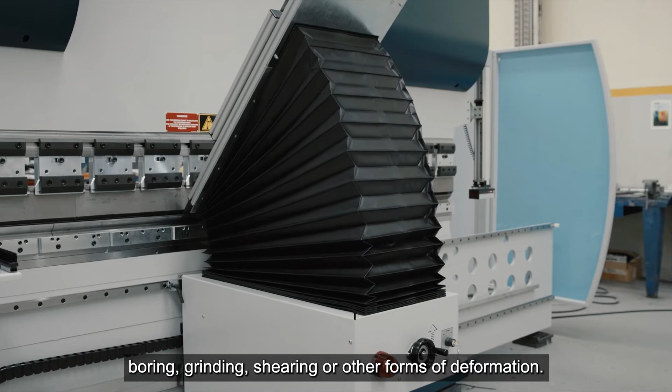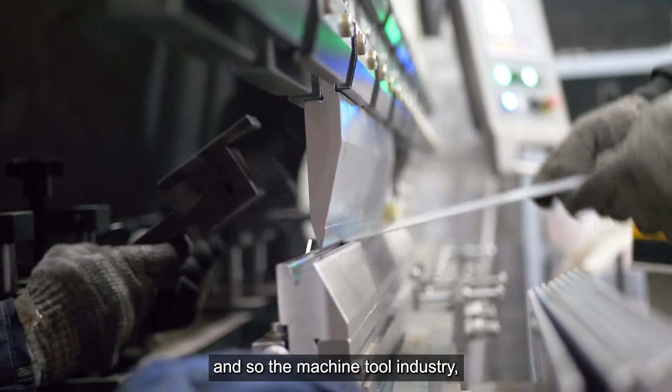A machine tool is the name given to any device for handling or machining rigid materials such as metal, usually by cutting, boring, grinding, shearing, or other forms of deformation. Our modern world would not be possible without machine tools, and so the machine tool industry, those companies that actually manufacture these devices, are interconnected with nearly every other major industry. And in a world trying to become more sustainable, this industry is also taking steps to move in that direction.

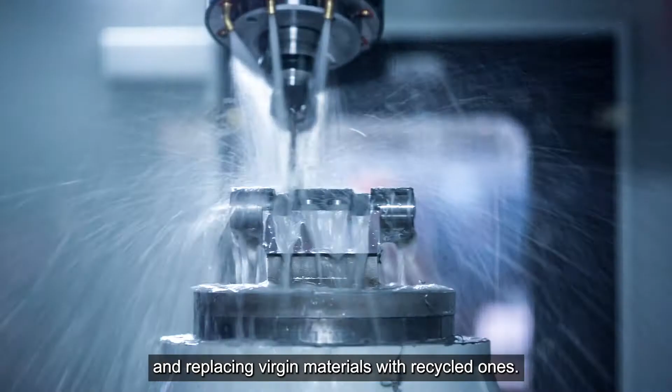To keep Europe competitive and achieve our sustainability goals, we need to maximize resource efficiency. This essentially means putting the materials contained in our waste back into productive use and replacing virgin materials with recycled ones, forming a closed loop, the basis of a circular economy. To make it feasible, industry must be innovative on several fronts: technological, financial, social, and organizational.

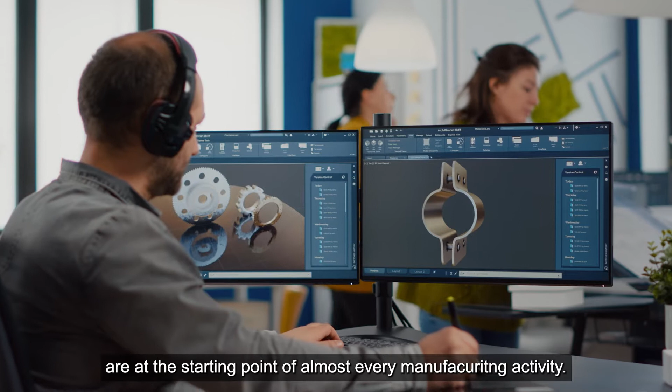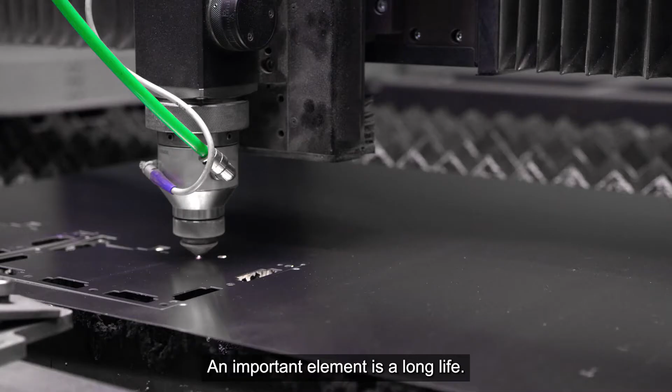Many people don't know that machine tools are at the starting point of almost every manufacturing activity. Our sector has a hand in most manufactured products. For instance, 83% of a machine tool is already today composed of easily recyclable materials. But we should all know that the circular economy goes beyond the recycling of materials. An important element is the long life, reuse and remanufacturing of products, with the aim of keeping them in the economy for as long as possible.

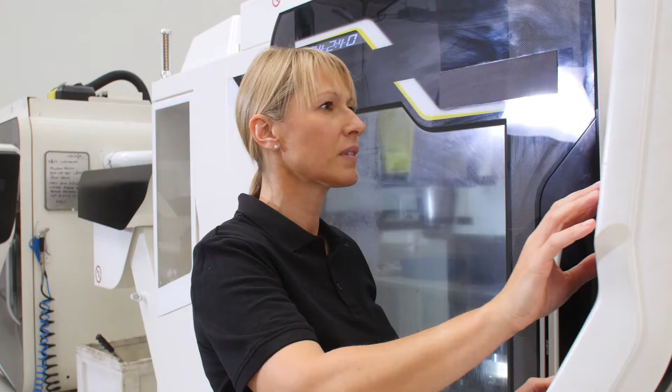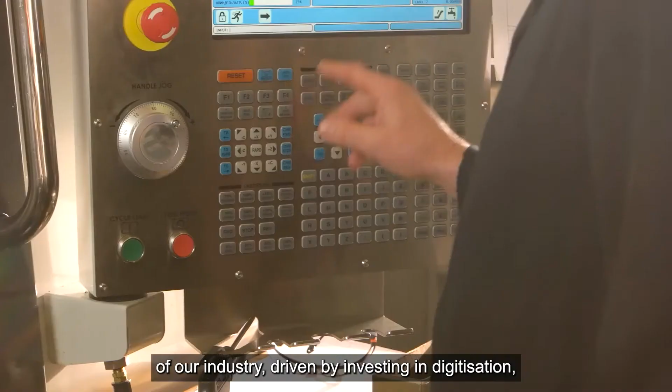CECIMO is the voice of the European machine tool industries and related manufacturing technologies that brings together 15 national associations and represents its interest at European, but as well on the global level. For more than 70 years, CECIMO has been promoting the manufacturing competitiveness of our industry, driven by investing in digitization, sustainability and innovation, and therefore contributing to the EU economy.

When it comes to sustainability, CECIMO's member organizations are innovating in various ways to improve their contribution to the circular economy. This manifests in a range of different actions aimed at improving the performance of its products and greatly reducing resource inputs in the operation of these machines.

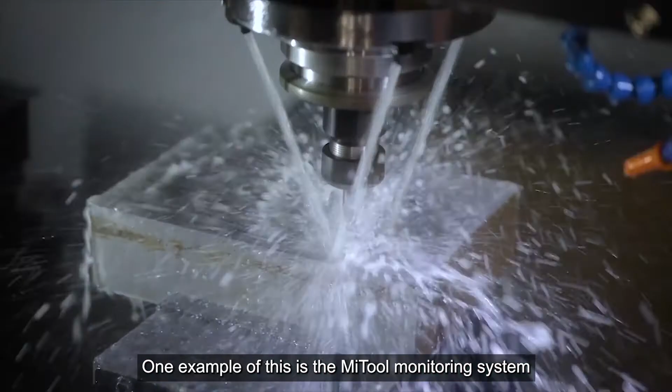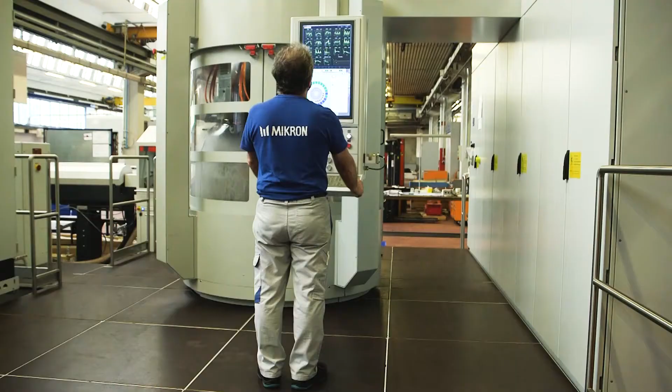One example of this is the MiTool monitoring system developed by manufacturer Mikron. Mikron supports industrial production companies in a wide variety of sectors. We produce and deliver high-performing machining systems. Our transfer solution aims to reduce cost per part produced, space requirement, staffing cost, and to increase manufacturing quality. When in addition, the Mikron MiTool monitoring system is used, also significantly fewer cutting tools are needed. All this has a significant ecological impact and supports sustainable manufacturing.

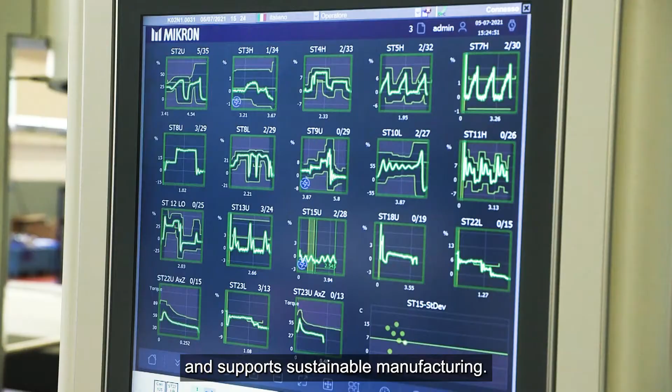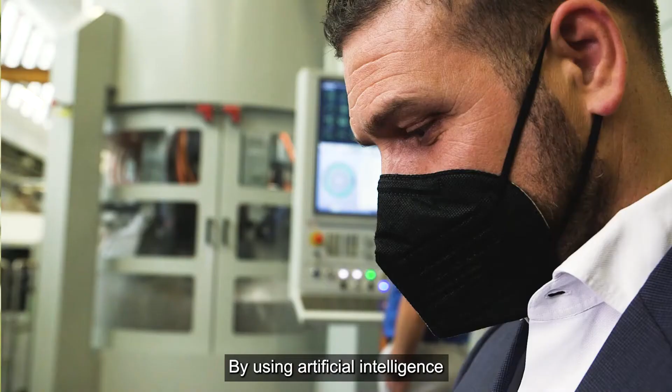Mikron MiTool has the highest sensibility and quality of data points, which deliver the finest and exact monitoring curves needed for the analysis. By using artificial intelligence, we developed an algorithm for advanced process optimization and cutting tool wear identification. All this leads to higher control over the production process.

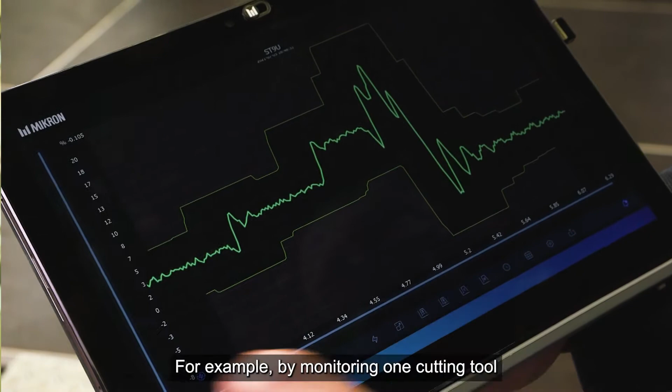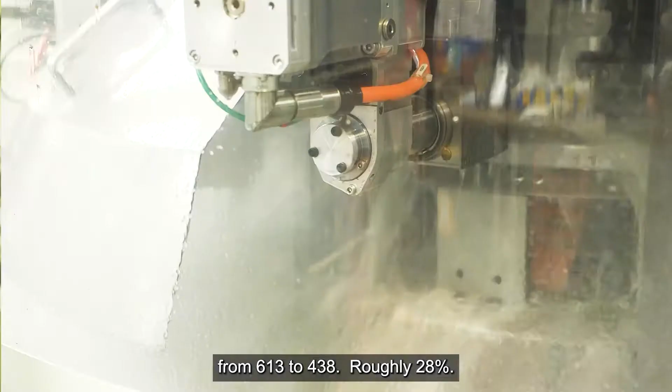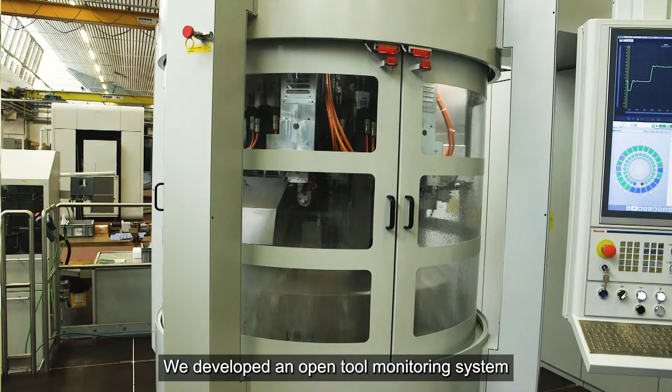For example, by monitoring one cutting tool with Mikron MiTool instead of traditional tool monitoring system, a customer was able to reduce the number of cutting tools needed from 613 to 438, roughly 28%. This means the machine can work in production for 900 minutes more due to fewer tool changes and fewer machine stops. We developed an open tool monitoring system which is working with all CNC controls and is suited for any machining center available on the market.

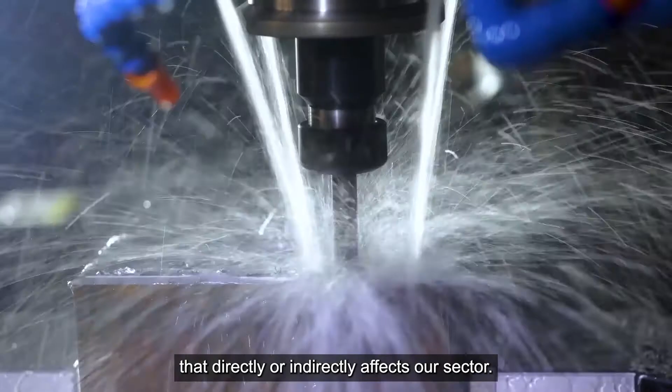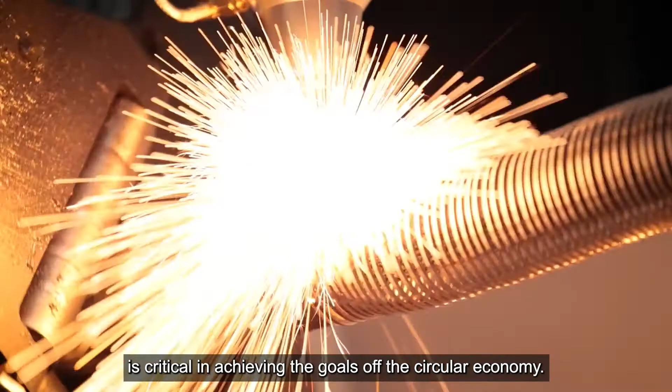If most of the machining processes in the market will use MICRON-METAL monitoring system, the ecological impact would be enormous. CECIMO represents the common position of European machine tool industries and related manufacturing technologies globally, and monitors for us the EU legislation that directly or indirectly affects our sector. The use of greener machine tools that minimize energy use, eliminate waste and reduce environmental pollution is critical in achieving the goals of the circular economy.

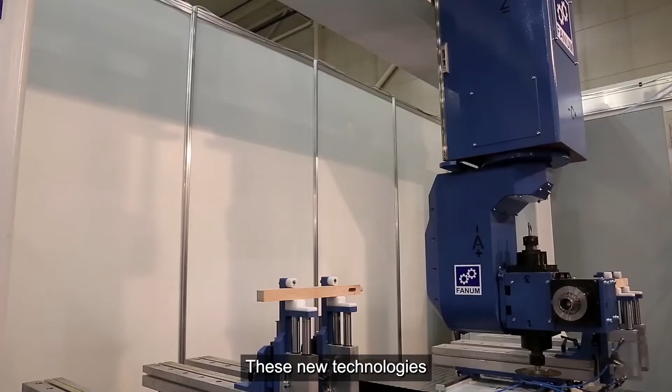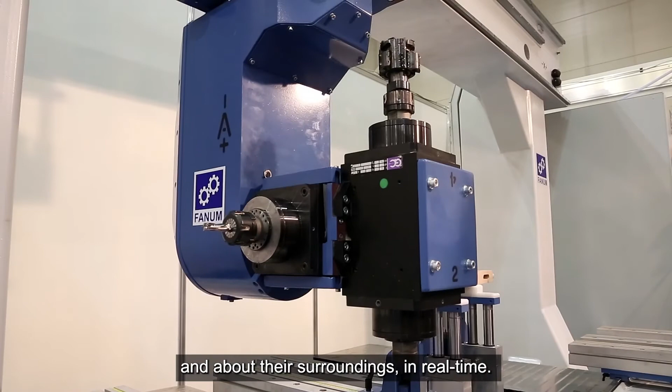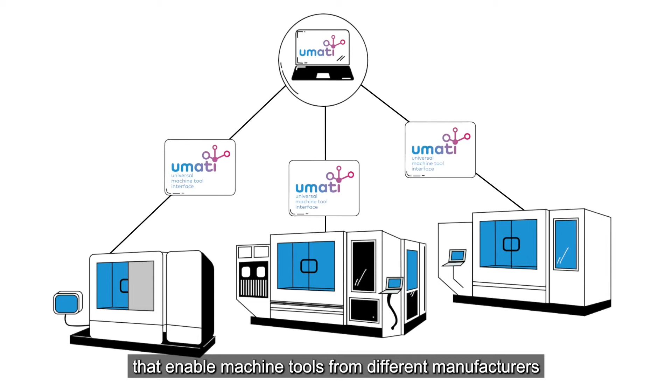This ongoing trend enables the optimization of manufacturing processes, capacity, energy use, and raw material use. These new technologies turn machine tools into intelligent assets which can exchange information about themselves and about their surroundings in real time. In this respect, it is important to highlight some sector-owned initiatives, such as UMATI, an initiative of our German National Association. UMATI aims at developing universal interfaces that enable machine tools from different manufacturers to exchange with each other.

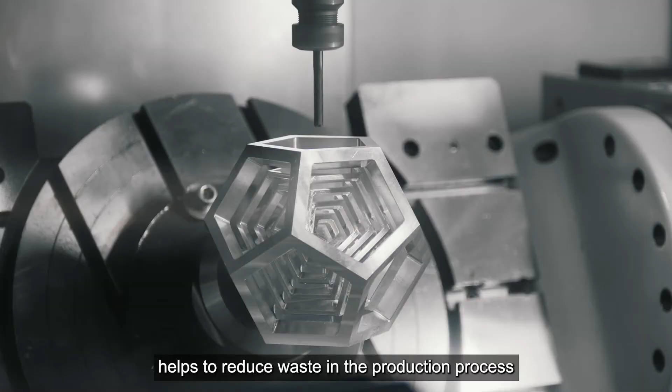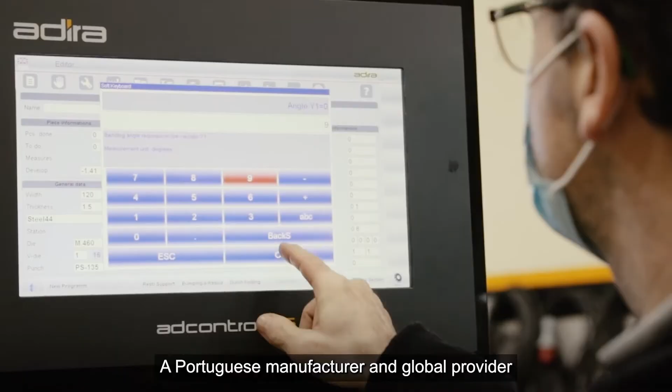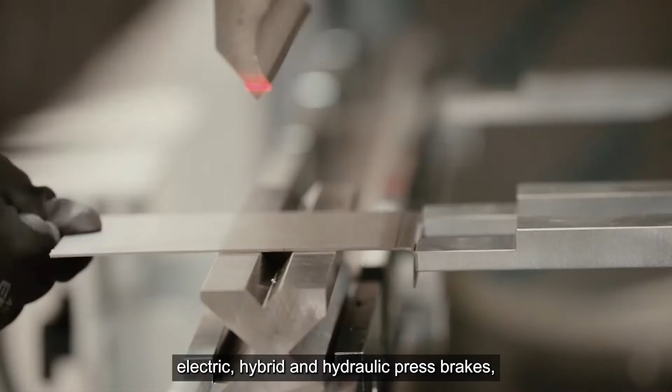Additive manufacturing, also known as 3D printing, helps to reduce waste in the production process, since they only use the material that is needed to produce a part. One company that is pioneering on the 3D metal printing front is Adira, a Portuguese manufacturer and global provider of metal forming engineering solutions. Aside from 3D printing, they also specialize in the design and production of electric, hybrid, and hydraulic press brakes, shears, automation, and robotized solutions.

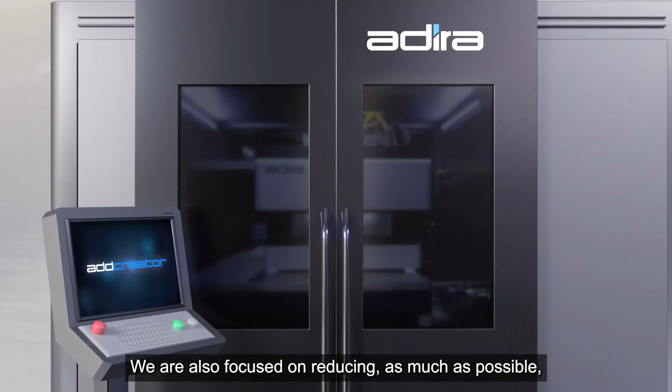Preventing climate change occupies a central place on our agenda. We have the ambition of pursuing activities which rely on renewable power sources and are increasingly focused on sustainable production. We are also focused on reducing as much as possible our carbon footprint. Currently, we produce approximately 25% of the electric power we need to operate.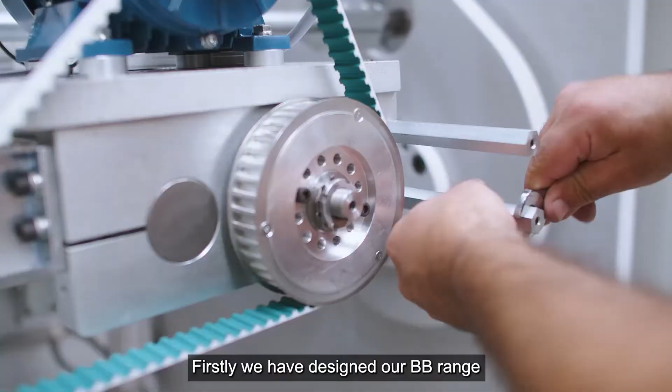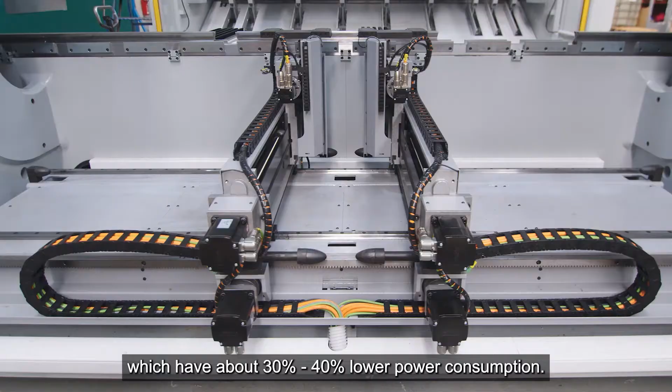Firstly, we have designed our BB range to be 100% full electric. And where full electric is not possible, our portfolio includes a hybrid range of products which have about 30 to 40% lower power consumption. We have also introduced several high-tech solutions, such as our state-of-the-art 3D metal printer. This printer does not produce metal parts using a subtractive process, which leads to a lot of waste.

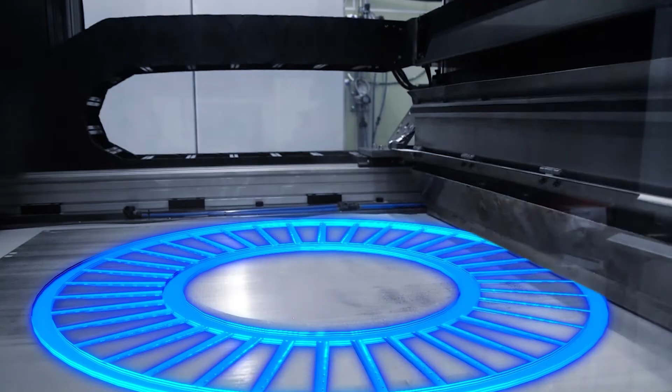Instead, it uses a metal powder additive process based on selective laser melting, whereas any powder excess can be used for the next project, leading to the production of a zero metal waste process.

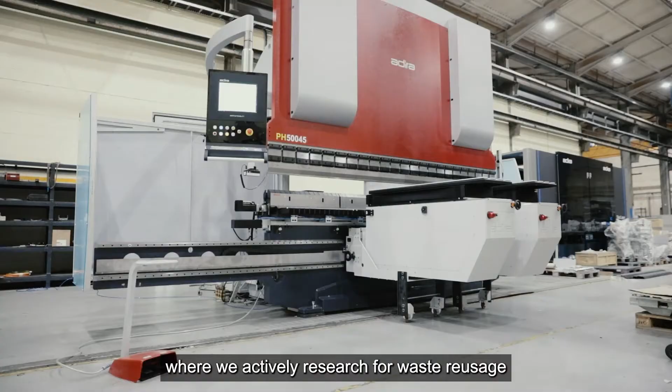The machine tool industry has a responsibility to forge a positive, sustainable, circular economy on the road ahead. We not only aim to create a zero-waste environment, but we are also involved in projects where we actively research for waste reusage from other areas of our industry.

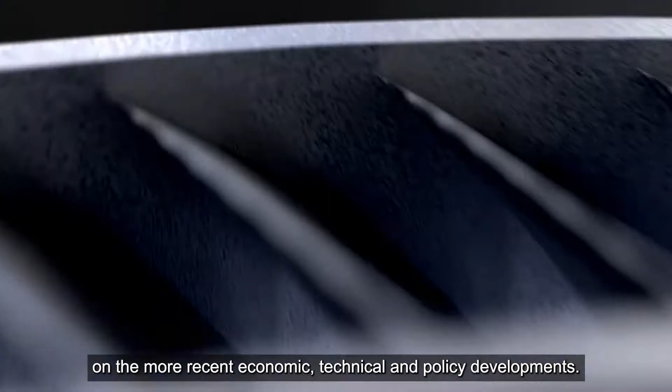Being a member of CECIMO provides Adira with updated information on the more recent economic, technical and policy developments, but it is also key in helping their associates' interests within the private sector and policymakers, along with a vision for upcoming challenges in the near future.

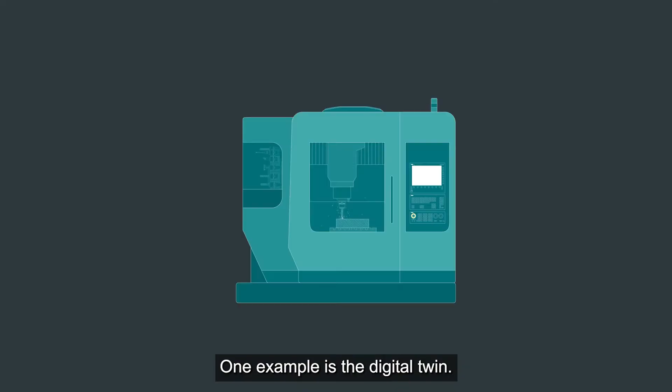Data-driven solutions provide us with information in real time. One example is the digital twin. It is a virtual model of a physical asset, such as a machine tool on the shop floor, and even in some cases of the whole manufacturing process. It provides a connection between the physical and the digital worlds.

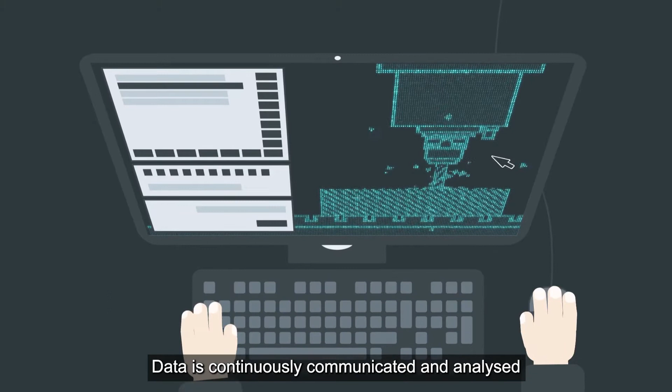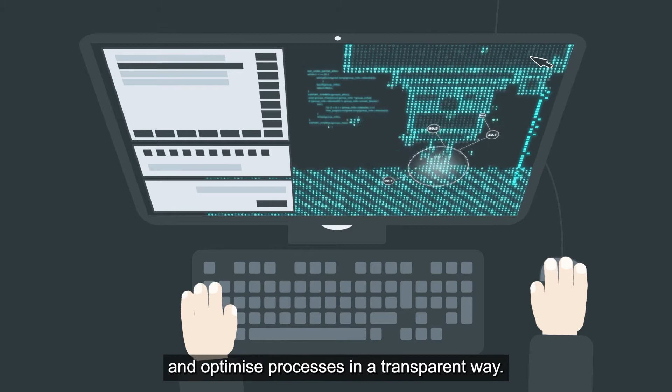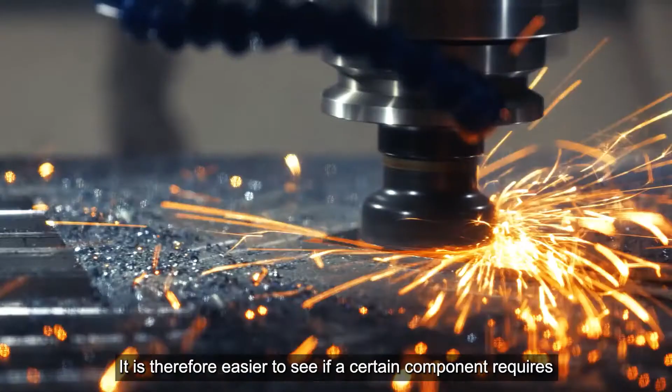Data is continuously communicated and analyzed by the digital twin, which can also accurately model the impact of changes to an existing manufacturing process and optimize the process in a transparent way. Having access to the data history of the machine tool allows manufacturers to visualize the wear and tear of each component. It is therefore easier to see if a certain component requires a repair or replacement, or no action at all.

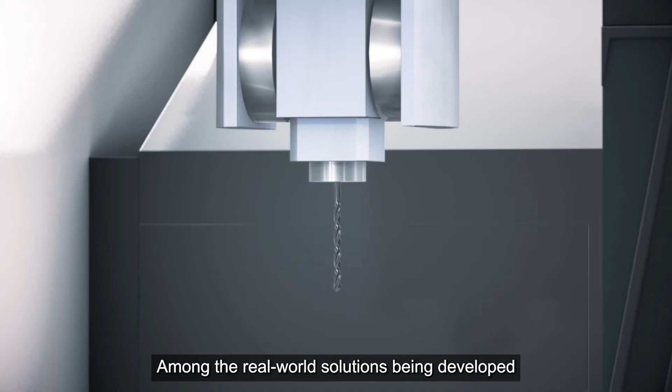Among the real-world solutions being developed is the creation of a special new compound called Hydropol by the company Framag. Hydropol can be used to build machines that make a much smaller impact on the natural and social environment.

Vibrations cause a lot of problems. They cause temperature, they cause a not smooth running machine, they cause a lot of fuel consumption, which is maybe not needed. For smooth running machines, Framag developed Hydropol.

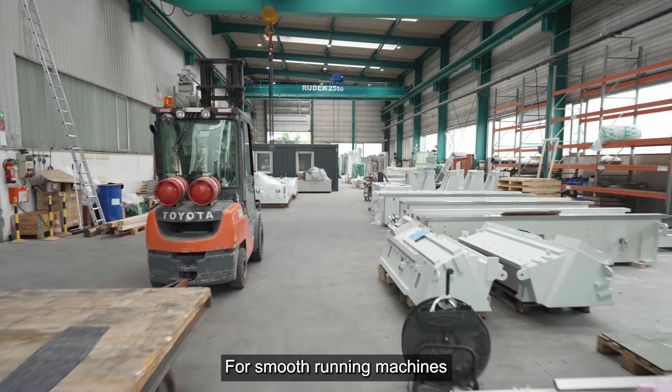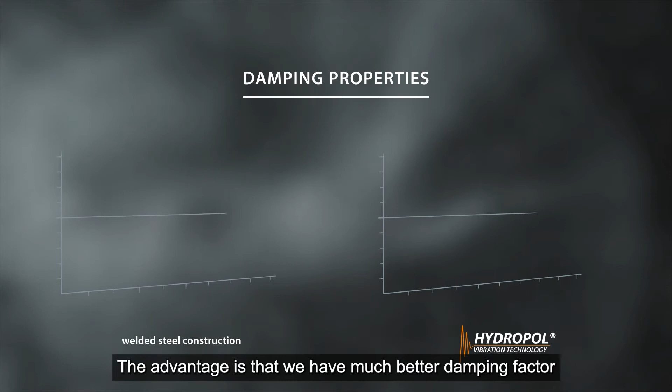Hydropol is much better than using cast iron or steel welded construction. The advantage is that we have a much better damping factor, and it is combined with a very economic production process and a recycling opportunity.

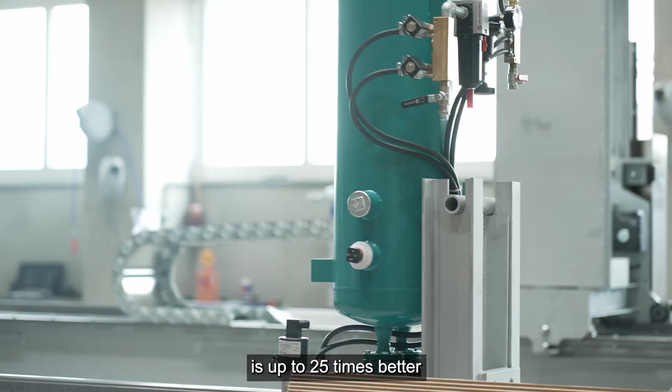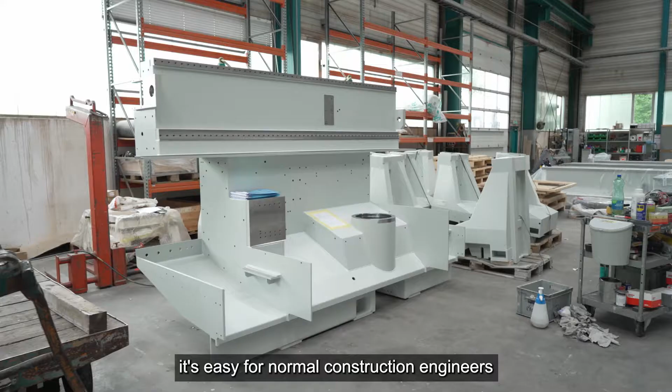The manufacturing and production process of Hydropol is up to 25 times better than the usage of a grey cast iron machine bed. If the end of the lifetime has come up, it's easy for normal construction engineers and construction companies to recycle and upcycle Hydropol parts.

Complex and sophisticated machining operations can be carried out in only one work process. The Hydropol machine bed from Framag also contributes to the machine's efficiency. The excellent damping properties help us to improve the surface quality and reduce the tool wear.

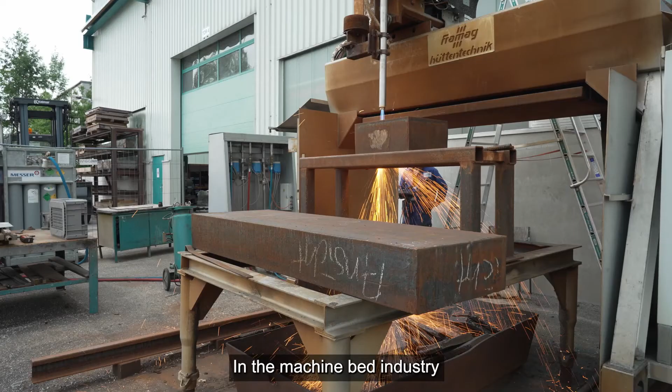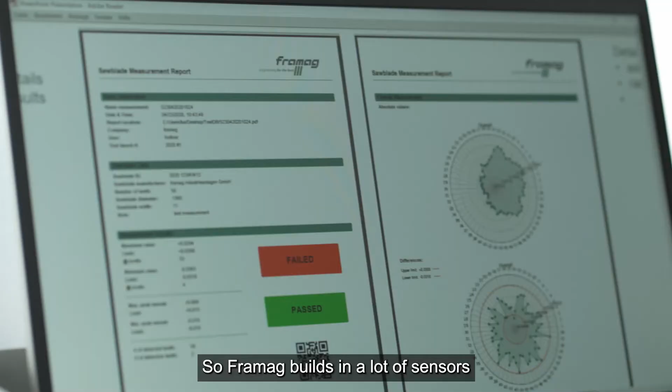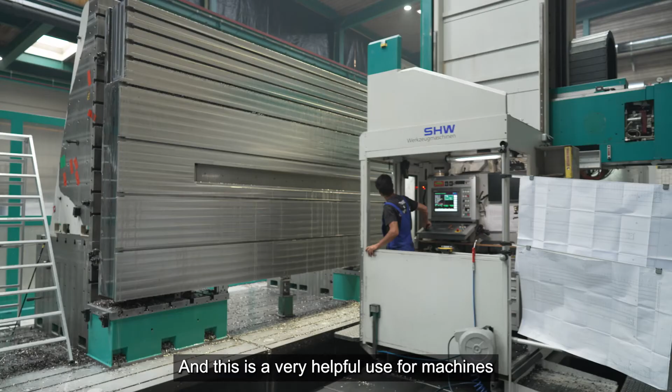In the machine bed industry, it becomes very important to know exactly what happens in the machine beds. So Framag can build in a lot of sensors for vibrations, for temperature and other system parameters. With these sensors, Framag machine beds can be heated up or cooled on the demand of the machine tool or the test rig, and this is very helpful for running machines smoothly and efficiently.

The multiple initiatives that our sector has undertaken clearly show the sense of responsibility and commitment of our industry towards sustainability. They are now slowly but surely starting to spill over.

Schneeberger is a Swiss group, and we are serving and delivering to our customers the product and elements for motion: linear guides, systems, spindle, bearing spindle and mineral casting for all different industries, beginning from machine tool and ending through semiconductor, electronic packaging, medical to aerospace.

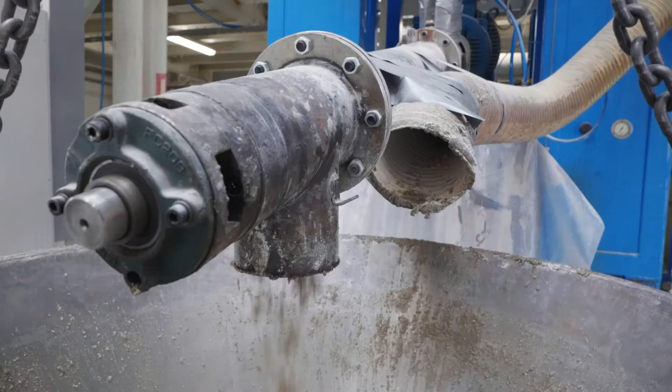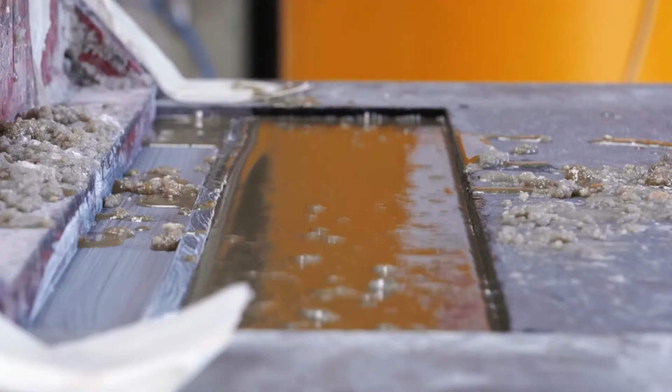The mineral casting is a relatively new technology and was created from the requirement of damping vibration. It's predestined for high-end applications, where the requirements of machines and equipment are high speed combined with high accuracy. The mineral casting is a cold casting technology.

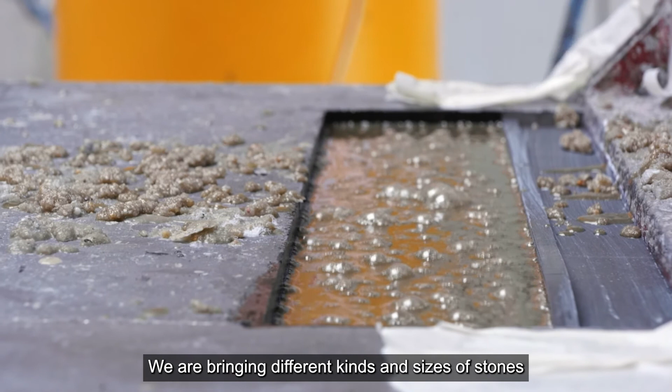We are not bringing additional heating or additional energy. We are mixing and creating, following special recipes with mineral casting material, bringing in different kinds of stones of different sizes, and gluing them with a little portion of epoxy, a special epoxy system.

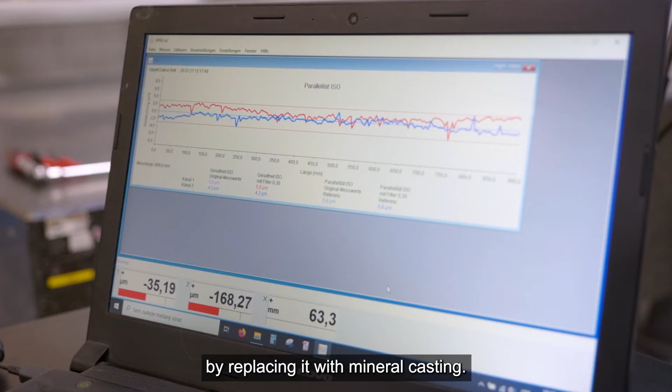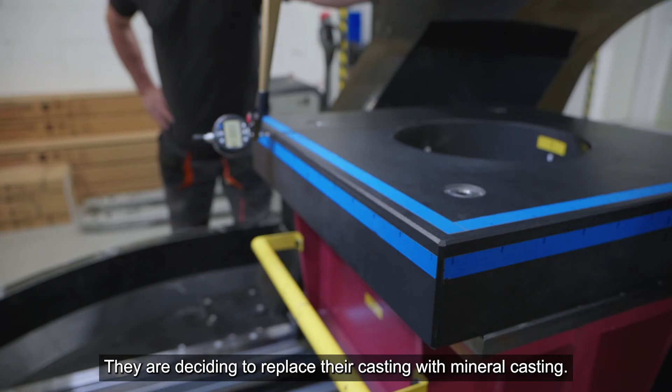It means, compared to old technologies like steel welding construction or cast iron, which we are replacing, we are definitely saving CO2 with a replacement by mineral casting. Per year, we are saving 14,000 tons of CO2 for our customers, in combination with their decision to replace casting with mineral casting.

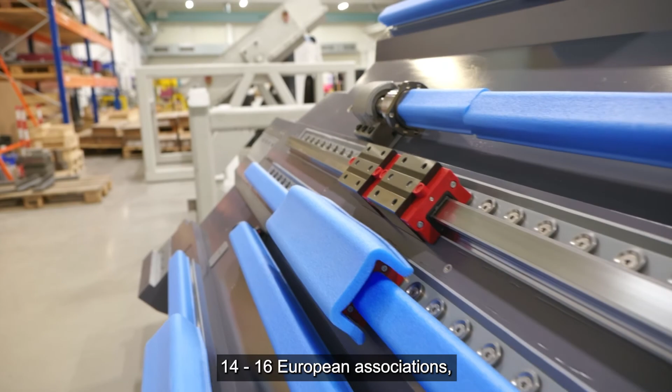We, as the Schneeberger Group, have been members of CECIMO for more than 40 years. CECIMO binds the power of 16 European associations together, and that gives us a voice that guides our industries. It's very important to be a member, to be active, and to take the possibility of having influence.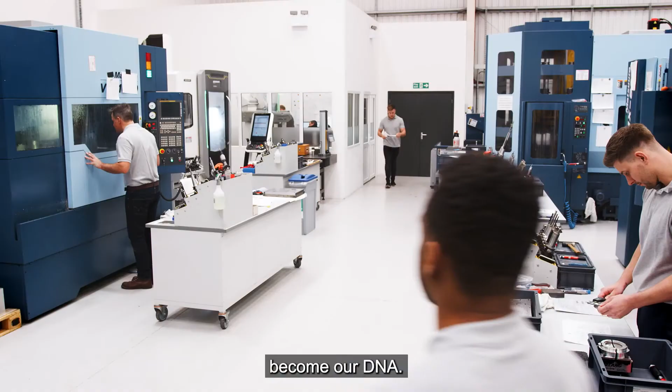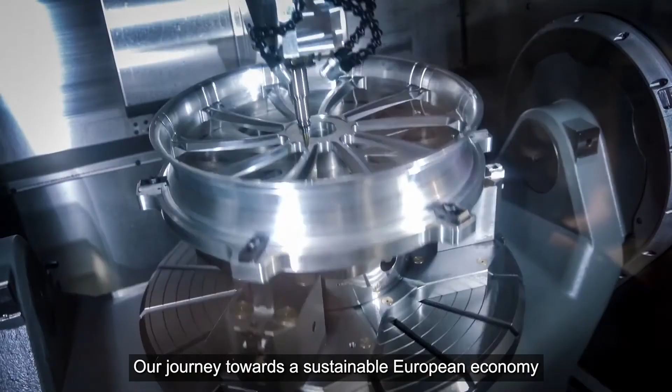As a sector, we still need to ensure that sustainability and circular economy principles become our DNA. Nowadays, many measures such as continuous performance improvement, maintenance, upgrading, refurbishing and recycling are already enforced. Our journey towards a sustainable European economy has just begun, and CECIMO will continue pushing towards sustainability.

As an organization, we are more interested in going far rather than going fast, and therefore we will need to work together with our customers and policymakers to meet the ambitious circular plan and to switch towards a more sustainable and green industrial production.